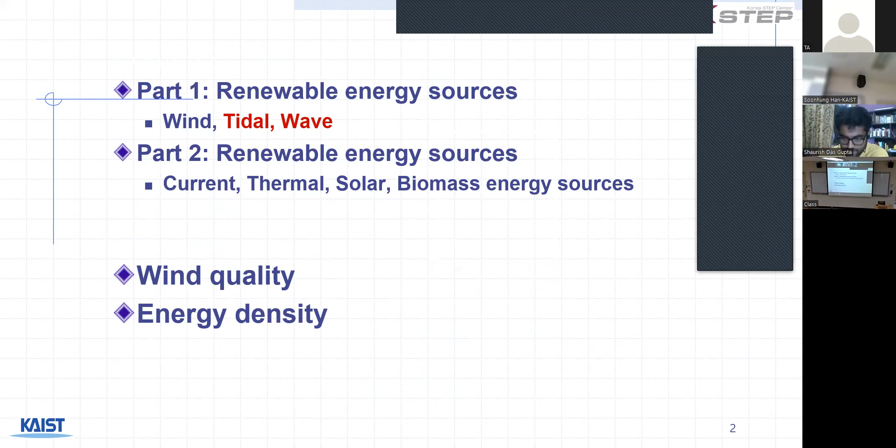Before we start talking about tidal and wave energy, what are tides? It's very simple, everyone has seen them. The tide is the periodic rising and falling of water that results from the gravitational attraction of the moon and the sun. So basically, all the tides you see on the sea or ocean are just the motion of water because of how gravitationally attracted they are to the sun or the moon.

A fun fact I found through the slides was that the solar tidal force is 46% as large as the lunar, which means the moon plays a big part in the formation of tides and tide cycles.

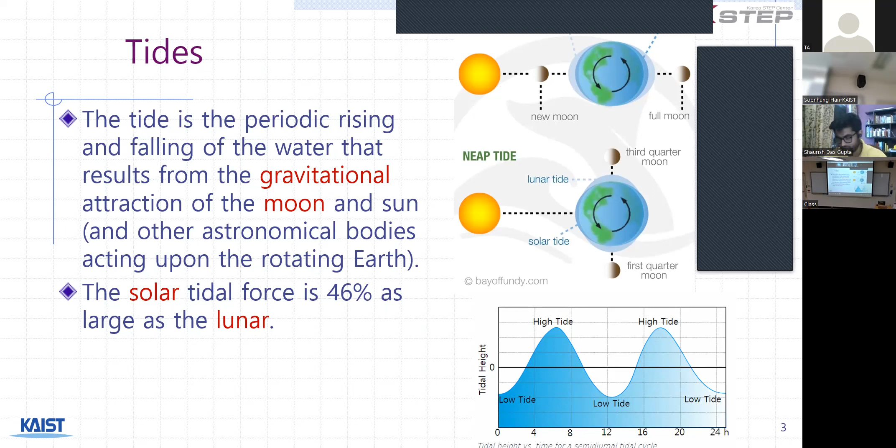Characteristics of tidal energy: a key characteristic that separates tidal energy from other forms of renewable energy is that it is concentrated and very predictable. With concentration, it means you can find places where you can place machinery to extract all the energy. You don't have to find a lot of places, as with wind farms, or struggle for a lot of extra machinery. You can find small streams, small straits, as seen in the bottom right image, where you can use the flow of the water to harness the energy.

In terms of predictability, with all the weather forecasting systems we have right now, we can predict what the tides will be, how long the tide cycles will be, and use that data to calculate the amount of power we can harness from it.

So we do not have to depend on luck or chance to harness energy, as we do with solar and wind, because we cannot predict when the sun will be at its peak, whether there will be clouds, or whether there will be wind.

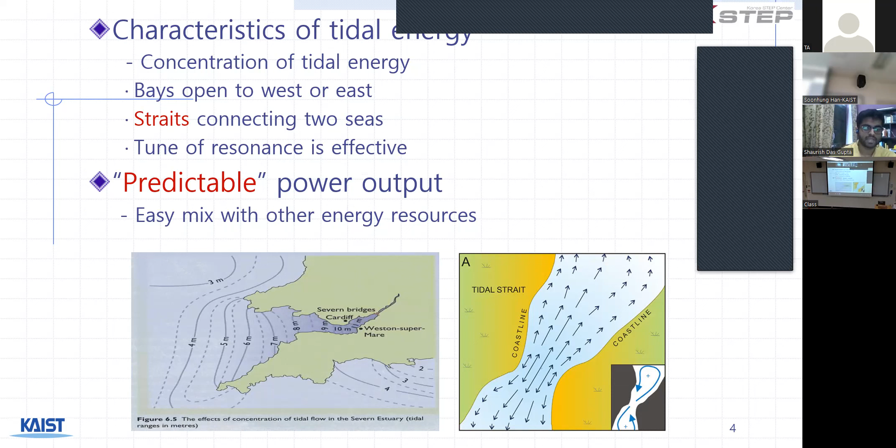So there is a very high chance of predictability with tidal energy, because based on the moon cycles and sun cycles, we can predict where the tides are and how long the tide cycles will be, allowing us to calculate and harness tidal energy much more efficiently.

There are basically two ways in which tidal energy is captured. One is the tidal barrage, which is the dam, whose main principle is using potential energy. The second is tidal stream capturing, whose main principle is the use of kinetic energy.

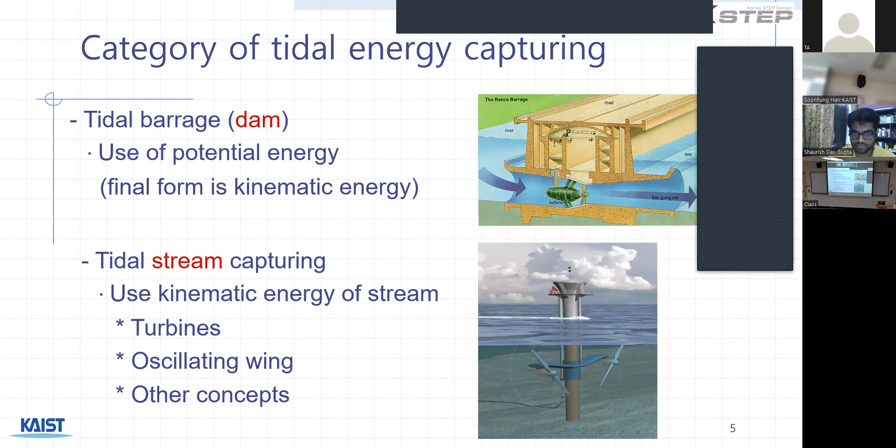Talking about the tidal dam: we basically use the inflow and outflow of the tides, as seen in the picture on the right. When the tide is incoming or outgoing, there is a height difference. This height difference leads the water to go from the left side to the right side when the tide is coming in, and the opposite - from the right side to the left side - when the tide is outgoing.

Whenever there is this motion of water because of the height differences, the water is usually passed through a turbine. The motion of the water causes the turbine to spin, which generates electricity. We can use the formula shown on the left to calculate the power output using the potential energy.

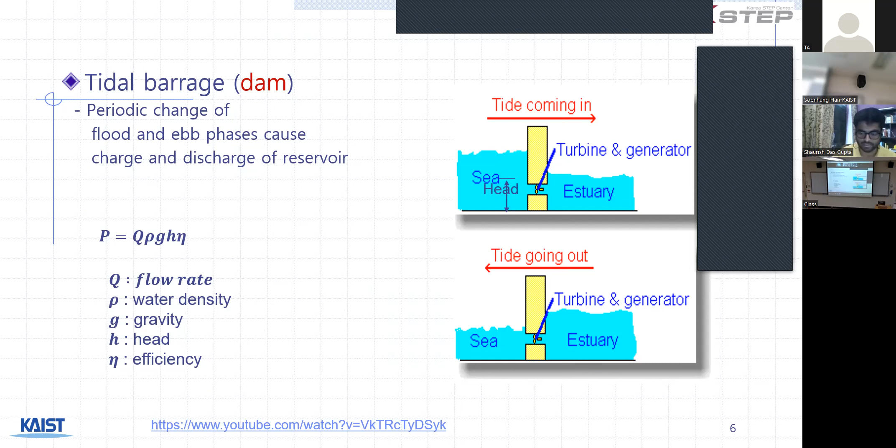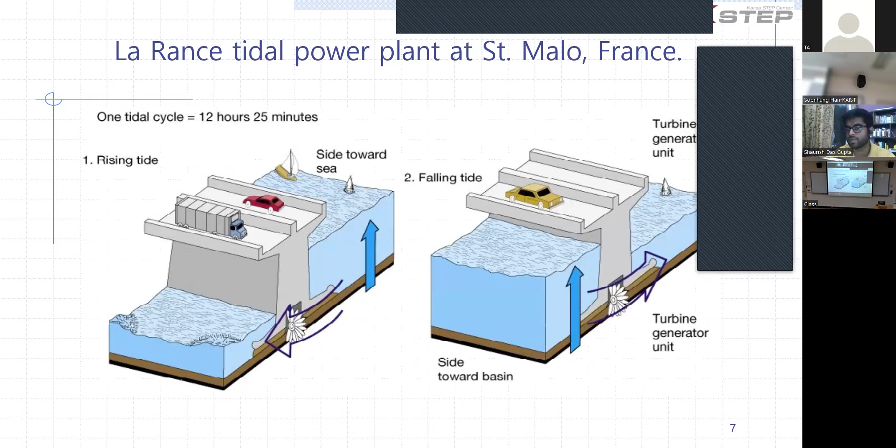This is one example of a dam used in real life, where we can use the height differences or the motion of the tide to generate electricity, and it does not hamper any human life or human processes. So, comparing different kinds of dams...

As you can see in this table, throughout the years the size and power output of the dams has increased. From the one in China creating 6 million kilowatt-hours per year output, to the South Korean one, which produces 552.7 million kilowatt-hours per year. We can see that with size, different sluice gates, and different generators, the output has increased.

But one limitation to dams is that they're very expensive and extremely huge. For this particular application, we need to find specific places that not only have good tidal flow but also make sure it does not affect human and animal life. Not only is it expensive, but it's very difficult to find places that can be used specifically for dam purposes.

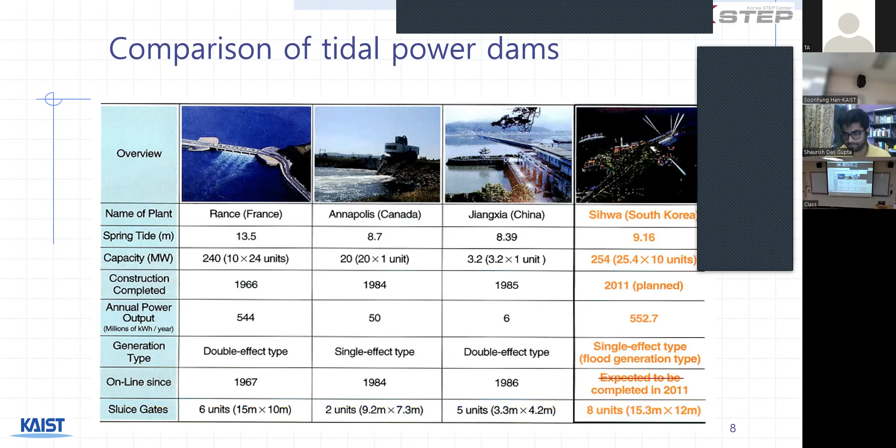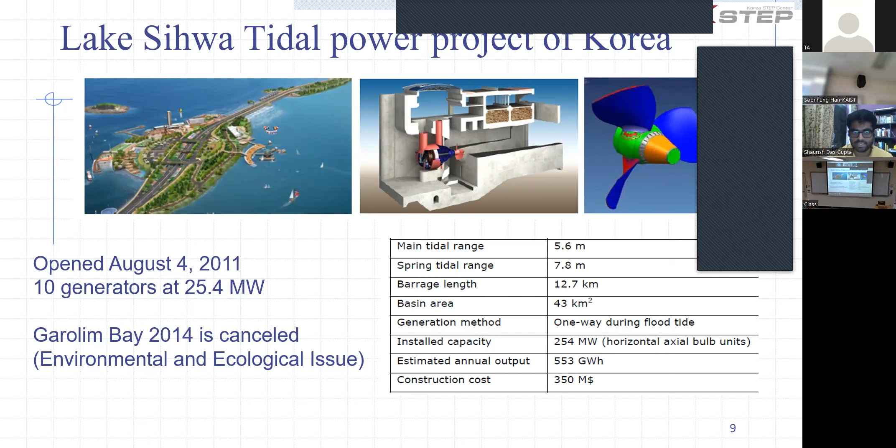We need to be considerate of the tidal flows that the place has. Also, we need to be considerate of the fact that constructing a dam does not cause any environmental or ecological issues. So this specific application of tidal energy is very dicey, which leads to the development of various other kinds of ways to capture tidal energy.

This project called the Pelamis is not an onshore project. It's basically a snake-like figure, as you can see in the picture, usually stranded in the middle of the ocean or sea. It uses the kinetic motion of the waves, which causes the entire structure to go up and down, as can be seen from the side view. This up and down motion causes pistons inside to compress and expand liquid, which is used to turn turbines, again producing electricity.

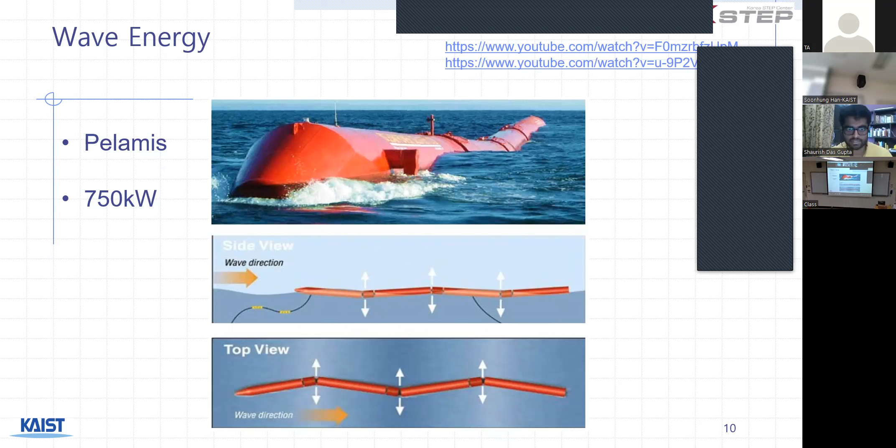I'll show you the videos later on. I'll just go through the slides quickly.

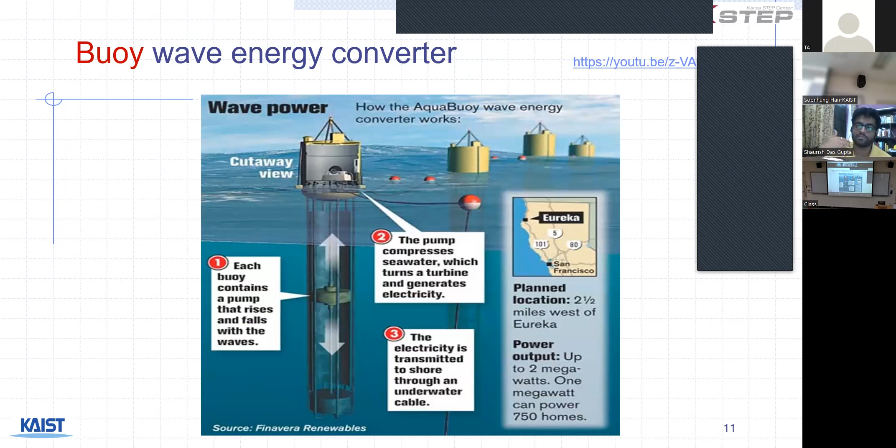Then we have a buoy. This is also an offshore establishment where buoys are in water, and each buoy contains a pump that rises and falls with the motion of the buoy, led by the motion of the wave. The pump then compresses liquid inside, which turns the turbine, which then produces electricity.

This is a very interesting offshore/onshore project, the Oyster Wave Energy Converter. The energy here is generated using the kinetic energy of the wave, which causes the entire structure on the left, as you can see, to move back and forth.

This back and forth motion of the flap causes the piston to move back and forth as well. The piston then compresses the liquid, and as you can see from the high pressure flow line, that liquid goes back to the onshore plant, which is used to turn the turbine, creating electricity. So while earlier projects were completely offshore, this is both an onshore and offshore project.

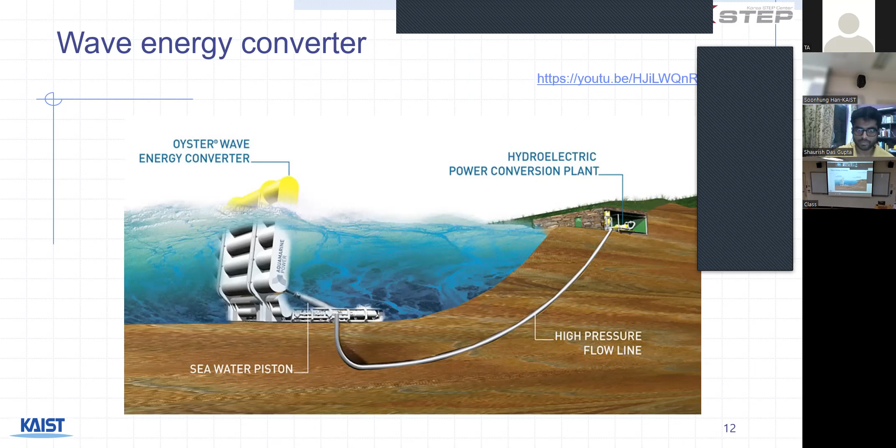Talking about anchored buoys, this again is a hybrid onshore and offshore project. The buoy is anchored at the seabed. The motion of the wave causes the buoy to go up and down, and there is a weight attached to the cable. As the buoy goes up and down, it causes a motor to spin, which generates electricity.

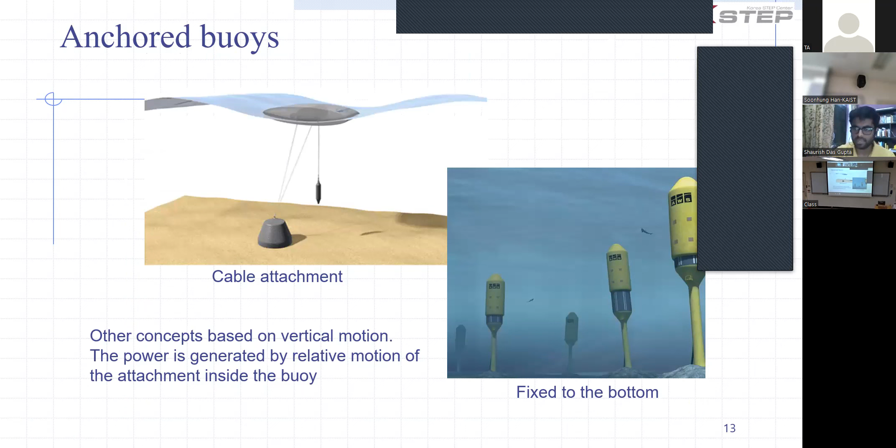Now this overtopping wave device, the Wave Dragon, is a completely offshore project. The wave will eventually rise over the establishment. There is a turbine inside; the water will go in and exit at the bottom. As the water goes through the turbine, it will cause it to rotate, which leads to the generation of electricity.

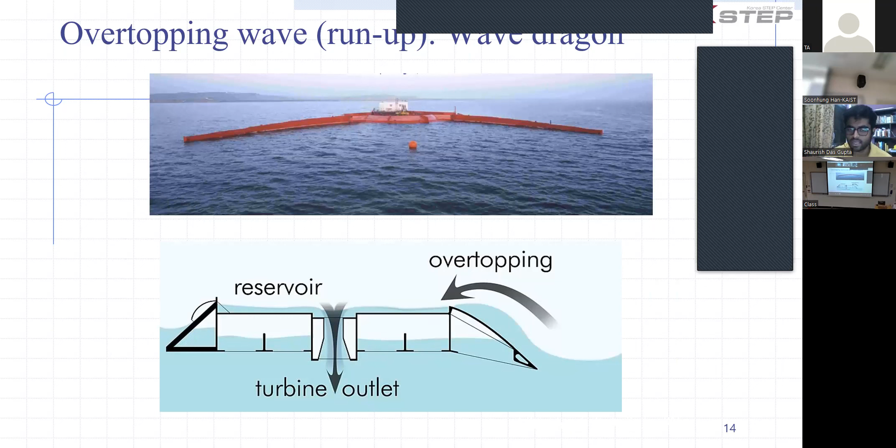This is another onshore establishment, basically using air pockets and how waves come in and go, which compresses the air pocket inside. As the waves go in, it compresses the air column, causing the Wells turbine to spin and generate electricity. As the wave goes back, the air column increases, essentially creating a vacuum, so air is sucked in, which again causes the turbine to spin and generate electricity.

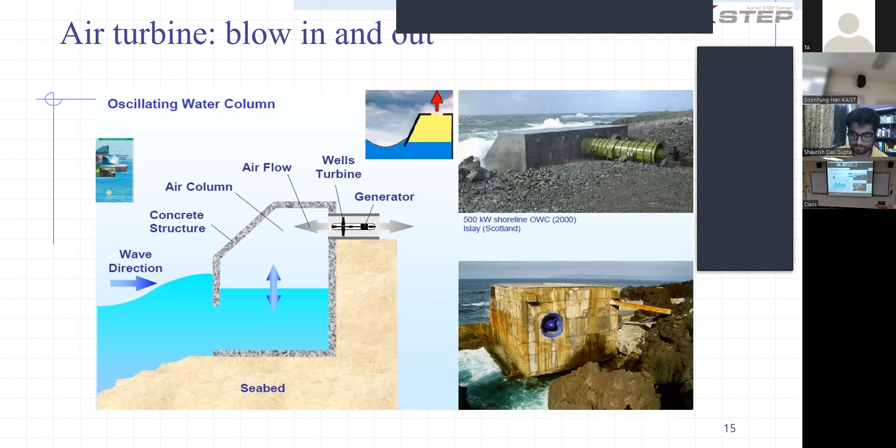So, going back to showing the videos.

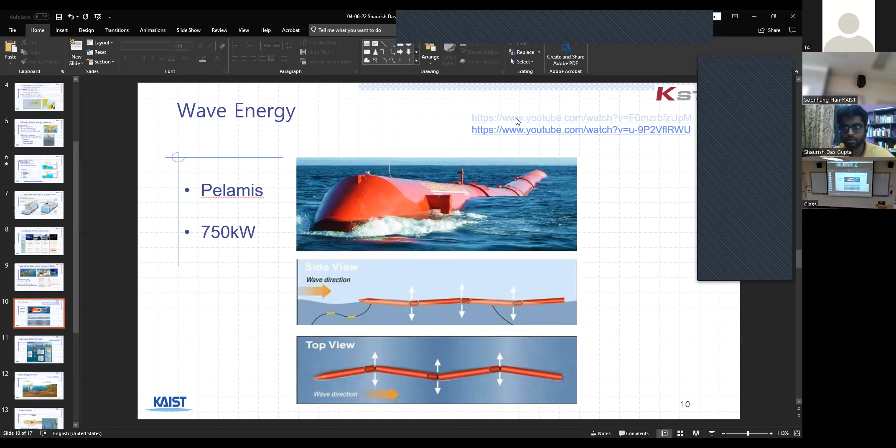So as you can see, this is a sideway view of the Pelamis. It's a snake-like structure, and it is a very long structure, so multiple waves can pass through the entire length. As the waves pass through it, all the small compartments of the Pelamis will go up and down.

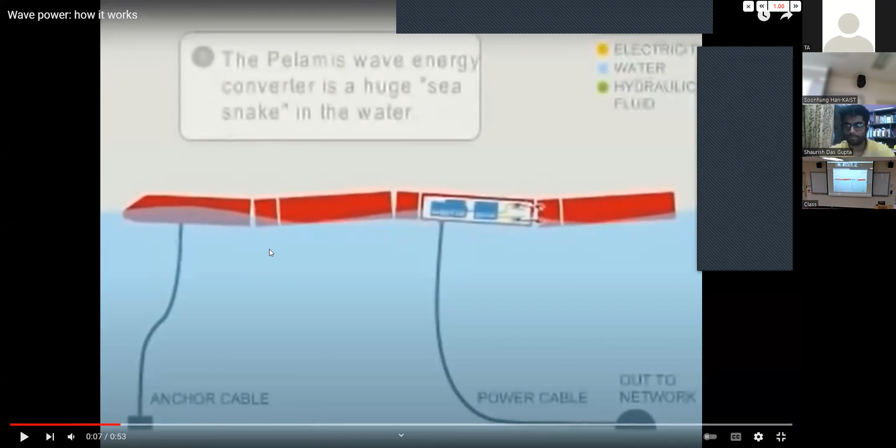As these compartments go up and down, there are two pistons that attach each of the compartments. As one goes up and one goes down, one piston compresses, the other expands. As the motion goes back, the other piston compresses and the top piston expands. This compression and expansion of the liquid inside is what is used to turn the turbine inside and generate electricity.

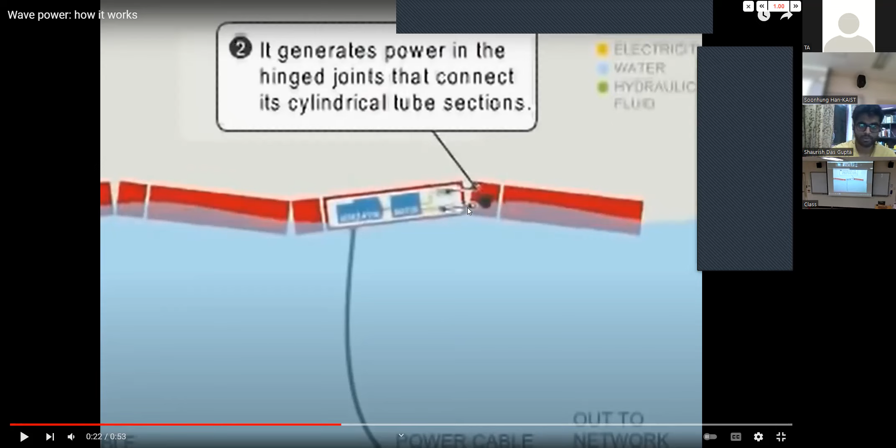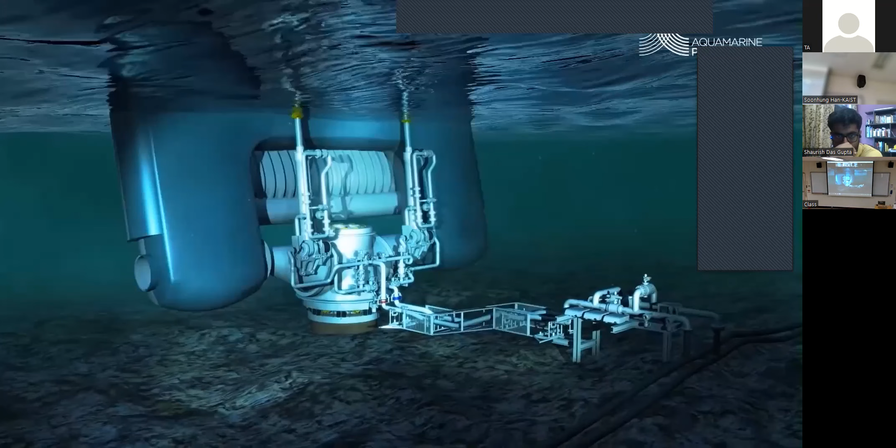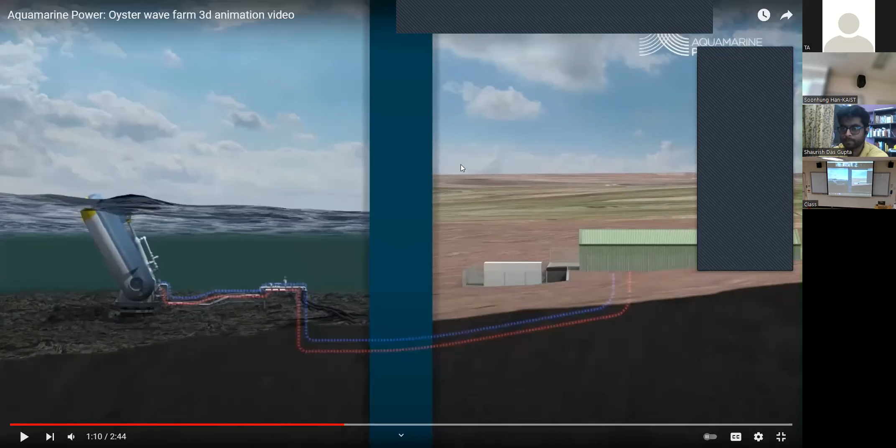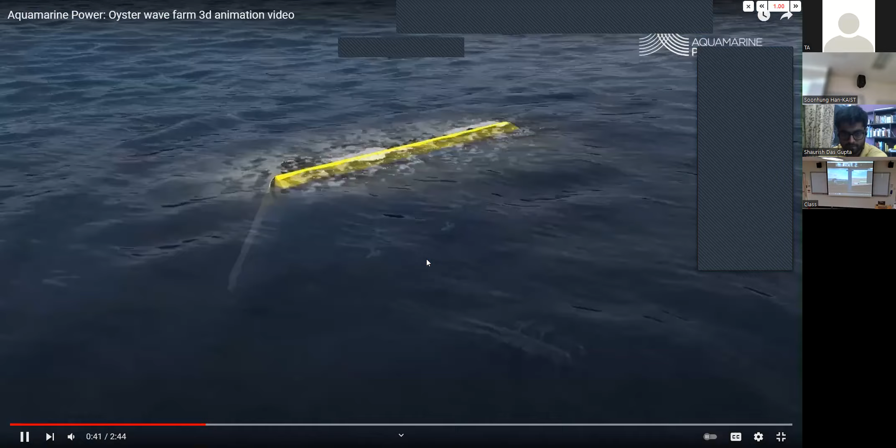Can you turn on the caption? There should be a wording from outside of speech. Or did I not share sound? Sound is not showing. Can you guys hear it now? Yes, also caption please. I can't hear you, Professor. Can you turn on the closed caption?

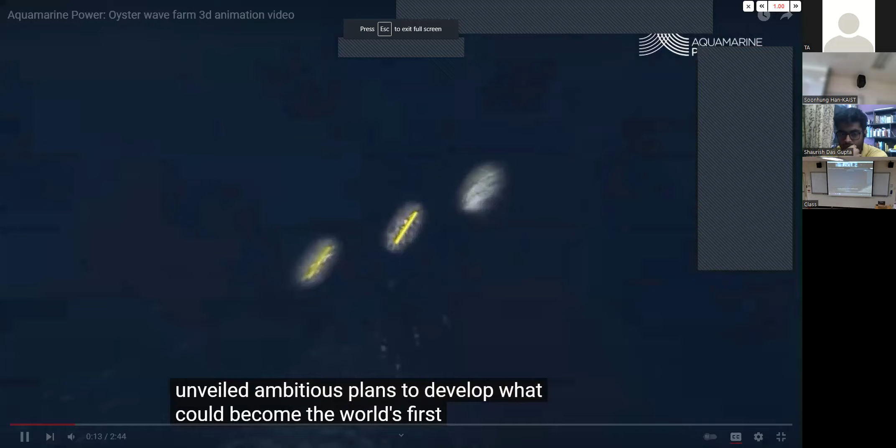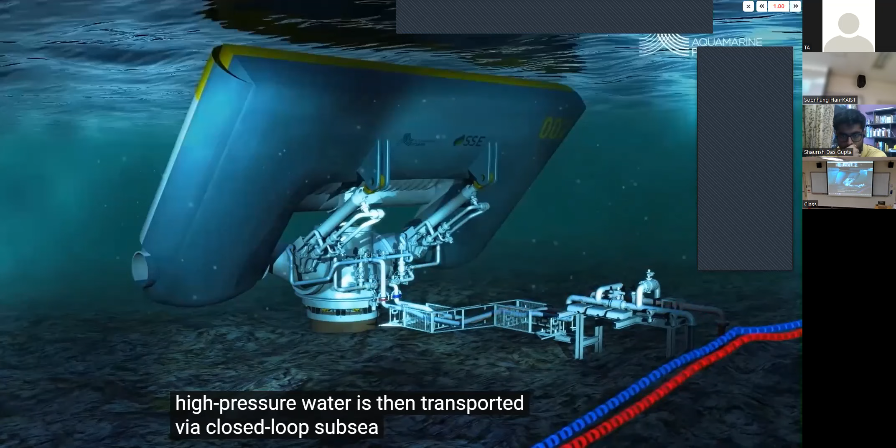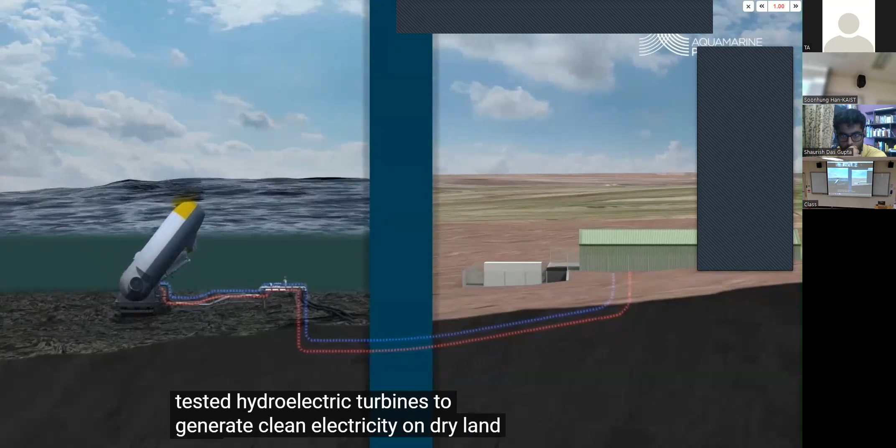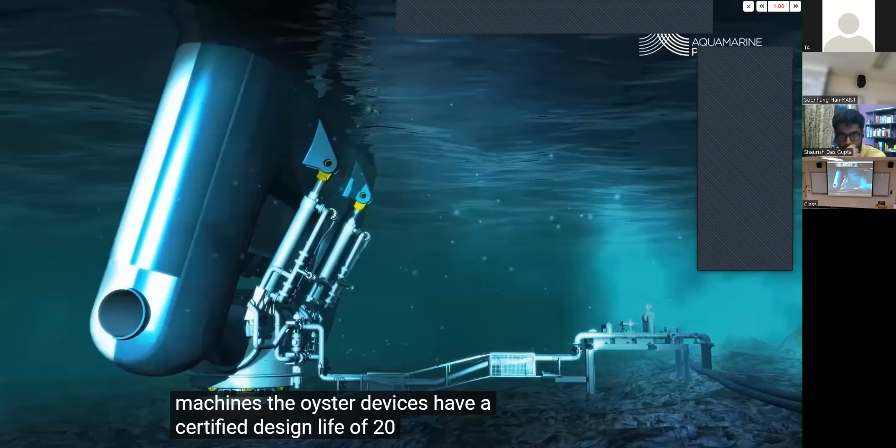Has unveiled ambitious plans to develop what could become the world's first ever fully commercial wave energy farm. Using their oyster wave energy technology, they plan to capture the abundant energy in near-shore waves and transform it into clean, green electricity. The oyster wave energy devices will be located around half a kilometer from shore, in waters around 10 meters deep, and will be connected via subsea pipeline to an onshore hydroelectric generating plant. The oyster devices are simple, buoyant hinged flaps, attached to the seabed, which pitch backwards and forwards in the near-shore waves. The machines are equipped with two vertical cylinders, each of which pumps high-pressure fresh water on both the forward and backward stroke. This high-pressure water is transported via a closed-loop subsea pipeline to an onshore power plant which uses tried and tested hydroelectric turbines to generate clean electricity on dry land. Each device is mounted on a piled foundation, drilled into the seabed by a jack-up barge. The buoyant flap can be towed out to the wave farm using a conventional workboat and is then lowered down onto its foundation, a quick and simple process which can be reversed to allow easy removal when maintenance or replacement is required. Economies of scale can be achieved through connecting multiple devices via shared pipelines to a single generating station, which also helps even out power fluctuations of individual machines. The Oyster devices have a certified design life of 20 years. Aquamarine Power's site on Lewis has the potential to become the world's largest wave energy farm. The company has received all required permits and consents from the Western Isles Council and the Scottish Government to install up to 50 devices along the coast at their site near Fivepenny Borv on the island's exposed west coast. Aquamarine Power believes wave energy presents a tremendous economic opportunity to local communities, Scotland and the UK, with potential to make a major contribution to the world's green energy targets.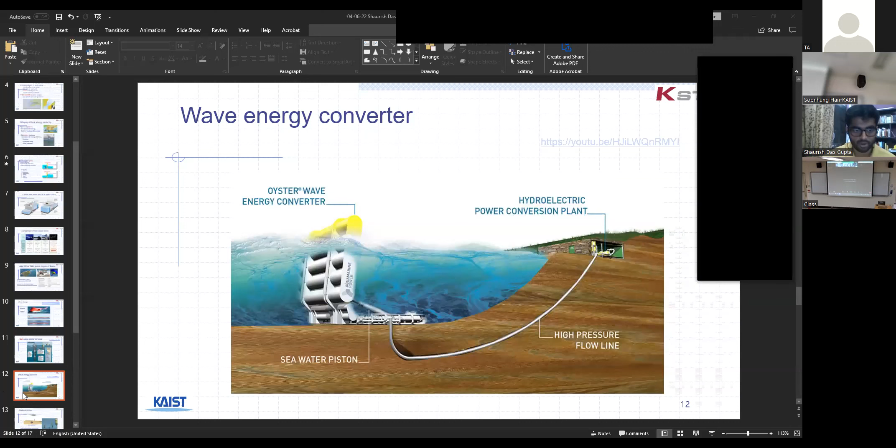So we have seen onshore establishments, we have seen offshore establishments, we have seen dams, we have seen wind turbines driven by waves, we have seen flaps driven by waves, and we have seen snake-like contraptions capturing the kinetic motion of the waves. But each of them have their own advantages and disadvantages. Onshore being a highly adapted solution, I personally believe the future developments in this field would all be offshore.

So instead of having an onshore and offshore system like the Oyster Farm had, this one particular company has developed a machine that will harness the kinetic motion of the waves and convert it into electricity. The entire machine is basically an underwater wind turbine, developed to float on the water surface and be left offshore, with a very minimally invasive strategy. It can be controlled offshore and onshore. To harness tidal or wave energy completely, I believe future innovations have to place the machinery inside the ocean or on the surface of the water. Let me show you a video of it.

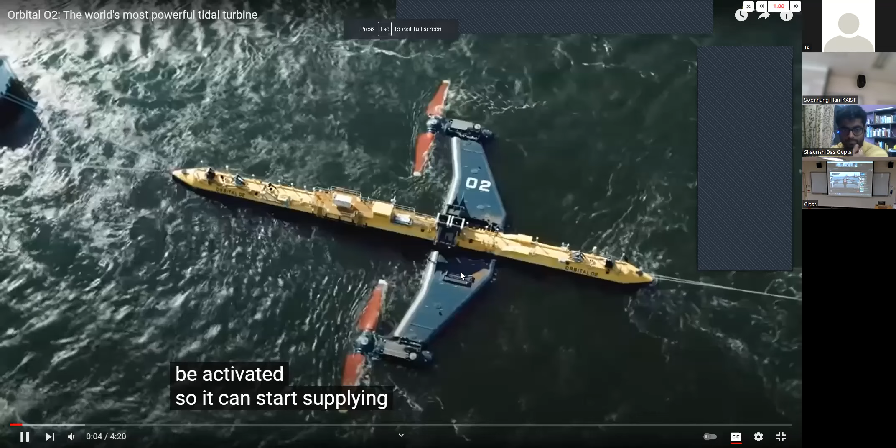This massive tidal turbine is about to be activated, so it can start supplying power to thousands of homes in the United Kingdom. The idea of harnessing power from oceans and tides isn't exactly new. Depending on how you look at it, it's really been going on for centuries. Your basic water wheel uses the force of flowing water to generate power. But what I want to talk about today is a little more powerful than that.

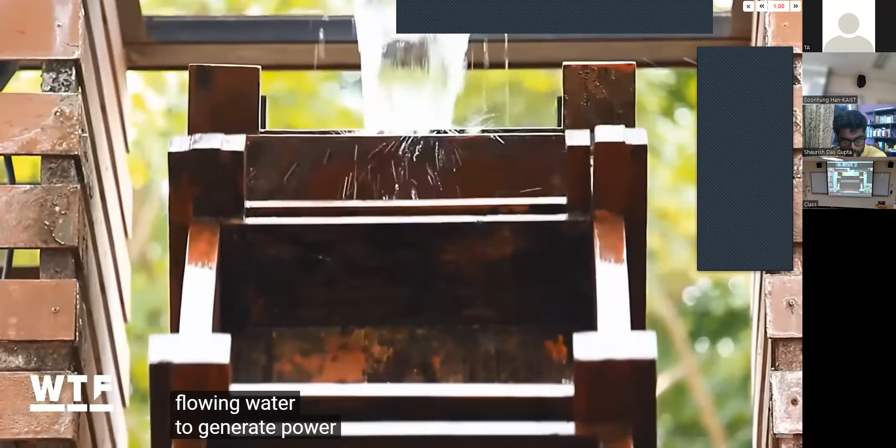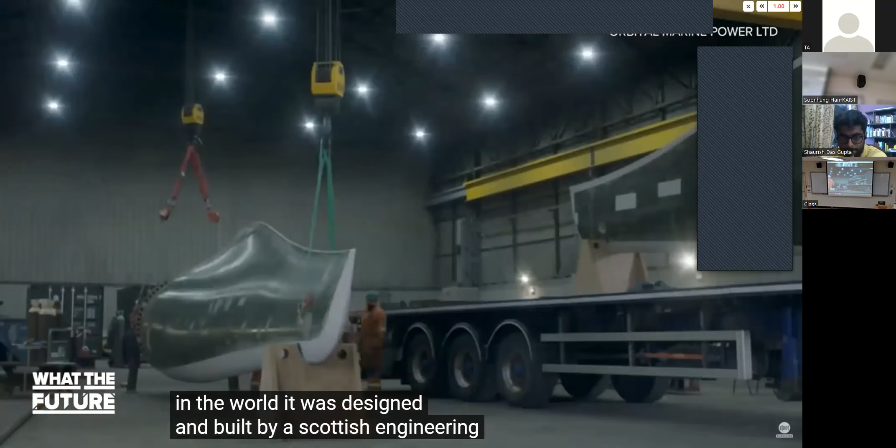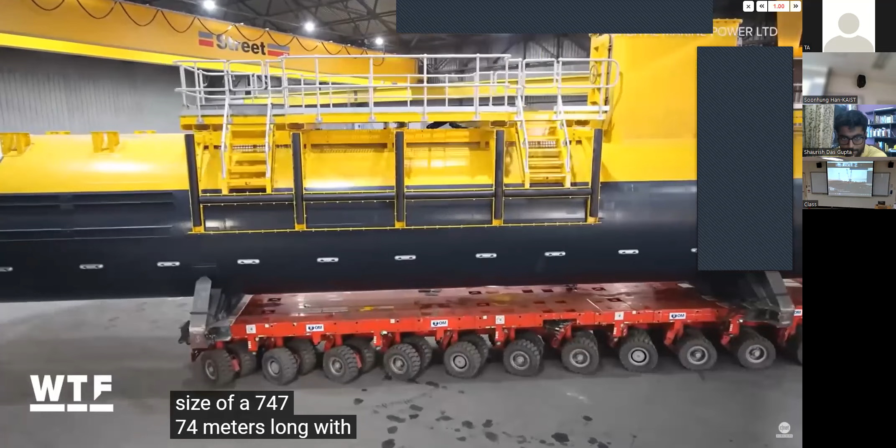This is the O2, and the company behind it calls it the most powerful tidal turbine in the world. It was designed and built by a Scottish engineering firm called Orbital. The O2 is a floating turbine about the size of a 747. It's 74 meters long with arms that reach 18 meters below the surface. The O2 weighs in at about 680 tons, and those rotors are 20 meters each, sweeping an area more than 600 square meters.

Orbital just delivered the first O2 to the Orkney Islands, which sit off the northeast coast of Scotland. If Orkney sounds familiar, you may have caught my video on Microsoft's underwater data center. That project also happened in these same waters, and that's not a coincidence. Orkney's blessed with some of the biggest, strongest tidal streams in the world, so it's a pretty good proving ground. It's a pretty hostile sea that surrounds it.

That is Orbital CEO Andrew Scott. He says the O2 can generate enough clean energy to power around 2,000 homes. So let's look at how it works.

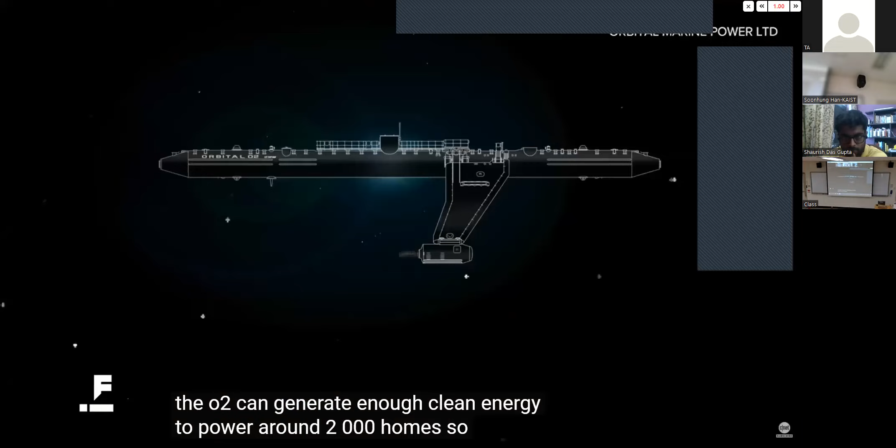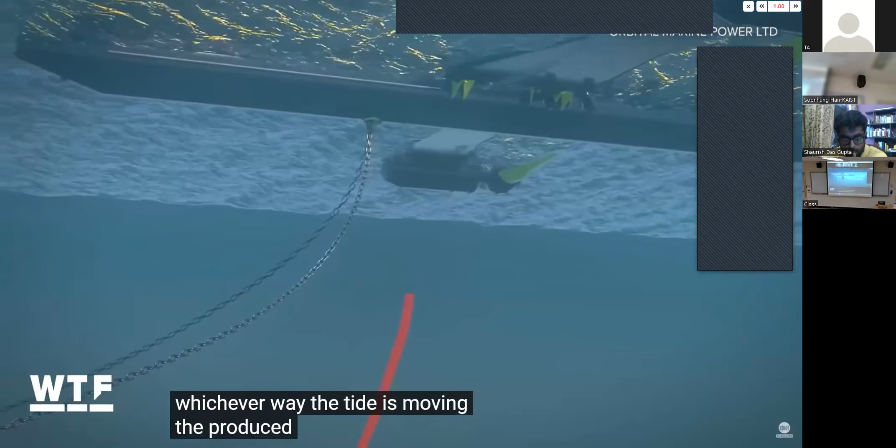The tube structure floats on the surface and is moored by an anchoring system. Inside that, you'll find most of the electrical equipment. At the end of those legs I mentioned earlier are the rotors, which are pushed by the force of the tides to generate power. The blades can be reversed in pitch in between tide cycles, meaning they can generate power whichever way the tide is moving. The produced power is sent through massive cables back to shore and into the grid.

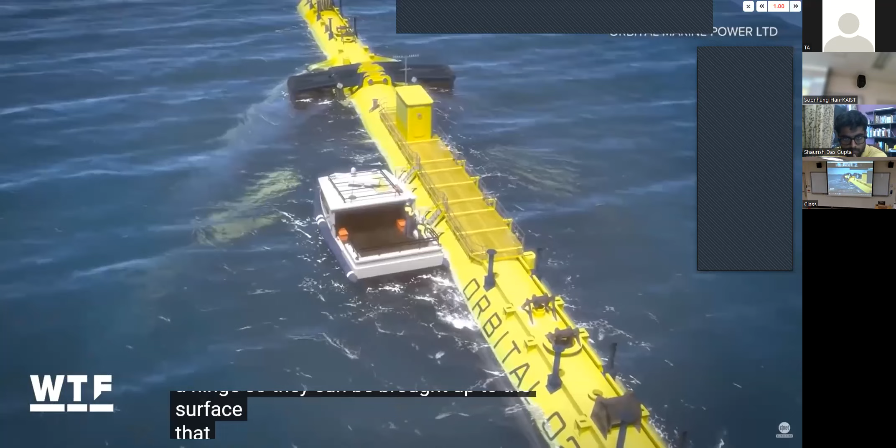That is why those legs are built on a hinge, so they can be brought up to the surface, meaning they don't have to send divers down to do any needed repairs. Deploying the O2 is pretty simple as well. Scott says it can be towed to its site by simple small tugboats, which are relatively inexpensive. Once the anchors and the mooring lines are in place and the cables being laid, which again can be done fairly simply and cheaply, we can effectively just throw the turbine onto site, connect it to its moorings, connect it to its grid, and away it goes.

So let's talk about the advantages of using tidal streams to generate electricity. Tides are packed with tons of potential energy. Some tidal streams are as much as 40 or 50 meters deep. Seawater is over 800 times the density of air, so moving water at 4 meters a second is massively energy dense. Because there's so much energy in such a small space, the turbine blades can be so much smaller than the ones you'd find on a typical wind turbine.

Another major benefit is that tides are predictable. Unlike solar and wind power, tidal streams aren't affected by the elements. As long as the moon is up in the sky, we know exactly how strong a tide will be at any given time. And if you're asking how do we know this tech works, well, Orbital has already proven it. The company successfully tested its prototype model in the Orkney Islands a few years ago.

As exciting as this project is, Scott admits that it's not going to be that silver bullet to solve the energy crisis and solve climate change. He says that the O2 is designed to work in conjunction to complement things like solar power and wind power.